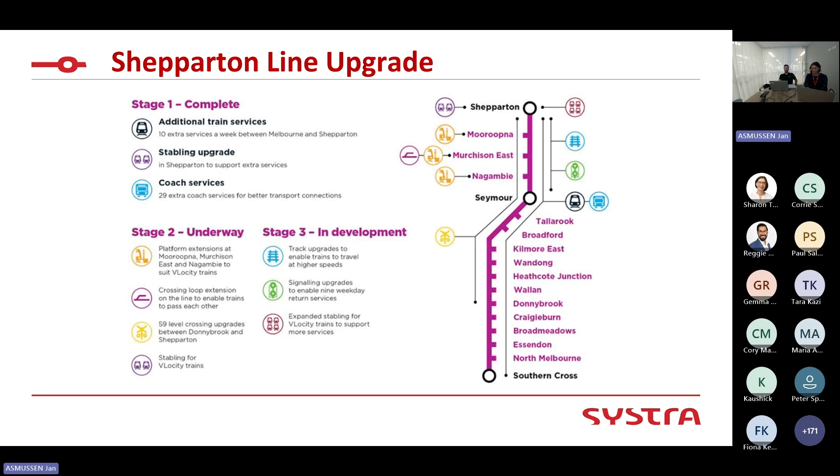So it's essentially a classic regional rail revival type project where you're increasing services between Southern Cross and Melbourne up to Shepparton and back down - almost a doubling of services in both the up and down, from about 5 to about 9 services, so essentially twice as much. Pretty big project.

So essentially what we did, when we came in, was in the first instance to understand what are the actual changes being introduced by the project and what the impacts are, because that's what helps us identify the best HF methods and tools that are amenable to reviewing and assessing these changes and the impacts, to provide that level of assurance that's required by the project - to basically provide the evidence of whether this design is acceptable or not for the end users and the intended use.

So the 5 high-level or main changes were: an extension of the TCS, the train control system called SIGVIEW, extending that across a wider area of the network, reducing train order working in those more remote areas. Train order working obviously has a pretty manual, onerous process, a lot of verbal paperwork, etc. This improves situational awareness with the new digital system.

Then we have the introduction of the Electrocode, which I'll explain in more detail later, because that's one of the examples we're looking into. That's to do with latency for setting and canceling routes and some new failure scenarios.

Then there's also the introduction of the slot - again, I'll go into more detail on the slot because that's our second example. Essentially there was additional tasks related to operation and interpretation of the slot mechanism. And then we had new signaling equipment, such as interlocking new track sections, so there's some failure scenarios associated to that.

And then, as I mentioned previously, an increase in train service, so more train routing and regulation and management of trains. We basically, together with the project engineers, identified what the changes were, the impacts, and then decided on what methods and tools we should use to apply to the work that we were doing. In the next few slides, I'll highlight what those methods were, and show how they were suitable to helping us provide that assurance for the system and the technology we were looking at.

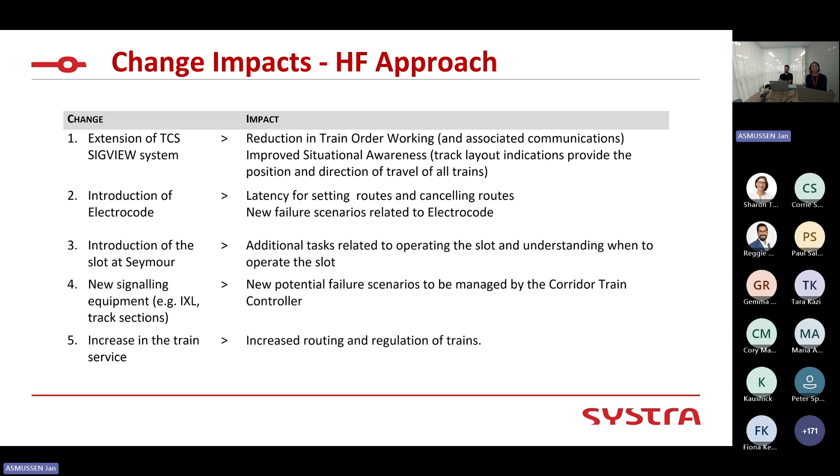So, example 1, as I mentioned, the slot. I'll briefly explain for those who don't know what a slot is. A slot is essentially a mechanism that manages the movement of trains onto a bidirectional single line between 2 different signaling areas. So you have signaler A and signaler B, they've got a straight piece of track, it's bidirectional, and only one train can go in at a time. So this slot helps manage the train moves into that section so that only one train can be going in at a time.

In one direction, essentially. So it kind of replaces the need for verbal communications and whatnot. It's essentially like a handshake between those two signalers sitting in different areas, managing their own areas of control.

So essentially what we did was we needed to provide HF analysis to basically show that this design is acceptable and it can be interpreted by the user, provides them with the right level of information, they can use it, etc. And as you can see, it's a pretty complex and not necessarily immediately intuitive design.

The different color lights each kind of light up depending on different circumstances and different scenarios and what's happening with the system, what's the user doing. It also provides them with information about what can and can't they do in terms of what route can be set, what route has been set, et cetera. So it goes on. And this is a static image.

So these are the types of images that we were actually provided on the project to help do our analysis on. So we didn't have a demonstrator or any dynamic environment to use to discuss with end users, elicit the system feedback, explain the behavior, et cetera. It was all with static images, and that was just the nature of the project and what we were working with. So that also kind of drove the types of methods and tools and approaches that we applied, which I'll get into in a bit more detail.

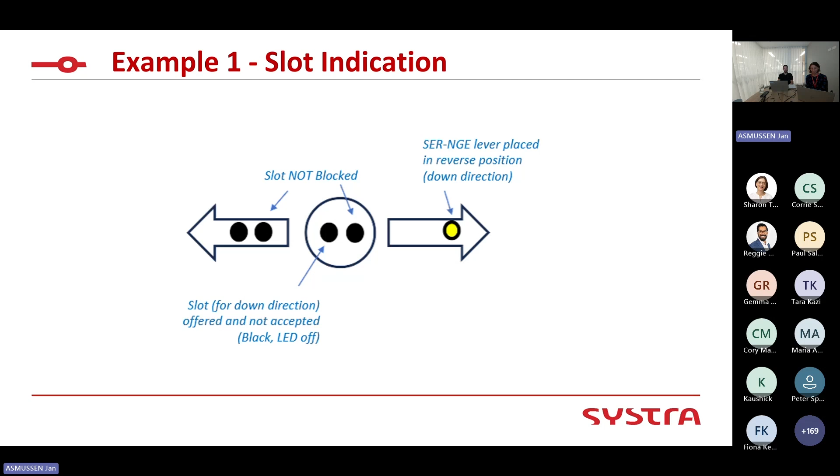So I'll move into the next bit. One of the first steps we did was defining the types of scenarios.

So looking at, what are the type here, we call them tasks, but these are essentially the different scenarios related to this indication. Working together with the project engineers, technical SMEs, we kind of identified all the possible scenarios and use cases relevant for that indication, where the user would need to interpret or use that indication to do their tasks or carry out these scenarios.

So we identified 4 in total that were relevant to the slot. There's setting the route, both in the up and the down. Then there's a local signaler - the one who sits and controls Seymour. And then we have the train controller who sits in Melbourne, called central - the central controller that controls a wide area of the network. Seymour is a local signaler, and they're just controlling their own local area over in Seymour. So the local signaler can turn a train back somewhere around here.

And that was a scenario that wasn't initially identified as relevant, but through the work that we did - through engagement with the end users - we identified that this would be a viable scenario that we would need to look at to understand how that all works.

And then we also had route setting when interlocking is disarranged, which was essentially a failure scenario. But for the purpose of today, I wanted to focus on just the task or scenario of setting the route, and we'll work through the next few slides.

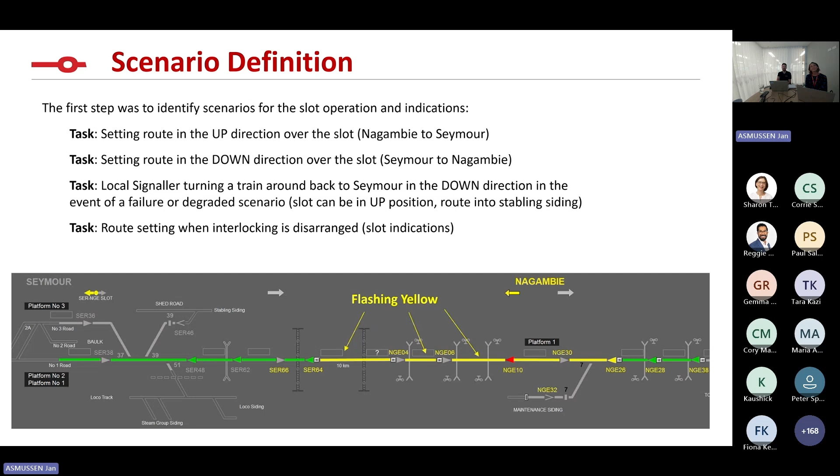What we did was we used a human error analysis, essentially a Sherpa, to structure that analysis and look at all these different types of information: what are the tasks, what are the critical, high safety, high operational impact tasks if there were any, and what are the consequences. Then we identified what types of controls are already in place through the design, or where the design might need to be changed to mitigate or manage these errors identified through application of our HEA. We've provided a simplified excerpt of the HEA just to show what the task was, the roles involved, a description of the types of errors identified, and the consequence.

That's how we worked through to identify all the different system behaviors and the controls or design elements that either helped or were required to help manage or mitigate these errors.

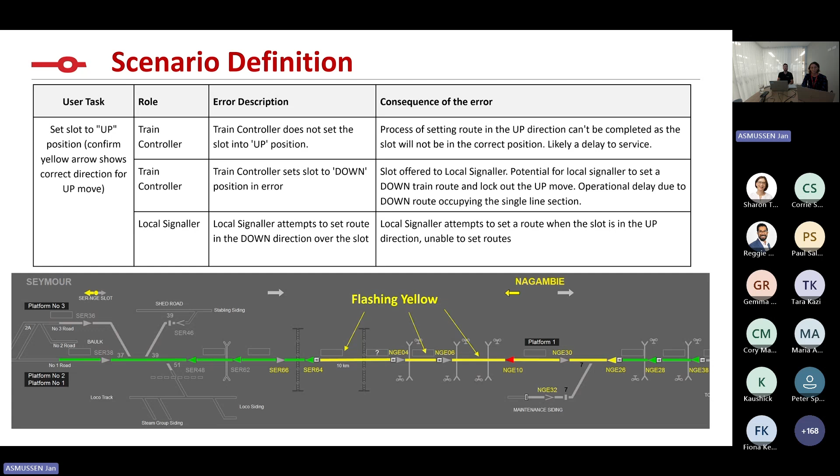Just a bit more technical detail here for those interested. This was the first task, setting a route in the down direction, down being from left to right. This is where the local signaler at Seymour needs to set a route into the down direction, over and through the slot, to send the train onwards into Nagambie and further downwards. In the first instance, the train controller sitting in Melbourne Central Command needs to set the slot to the reverse position. Reverse is equivalent to the down direction, going to the right.

On the local signaler's panel, they have this color light panel with two directional arrows and a central circle. Those lights illuminate depending on the slot status. If the slot is set to down, that down arrow will illuminate the circle, indicating to the local signaler that the train controller has set the slot to down. That means the train sitting on road 3, which the signaler knows needs to go from Seymour down to Nagambie at a certain time, now has that slot set in the down direction. The local signaler knows that.

When the local signaler sets their route, the color light then illuminates yellow, telling the local signaler that their route has been accepted. Meanwhile, the train controller can see this on their train control system - this TLD is what the train controller sees. They can see that the local signaler has set the route, now set and locked, shown by the yellow indication.

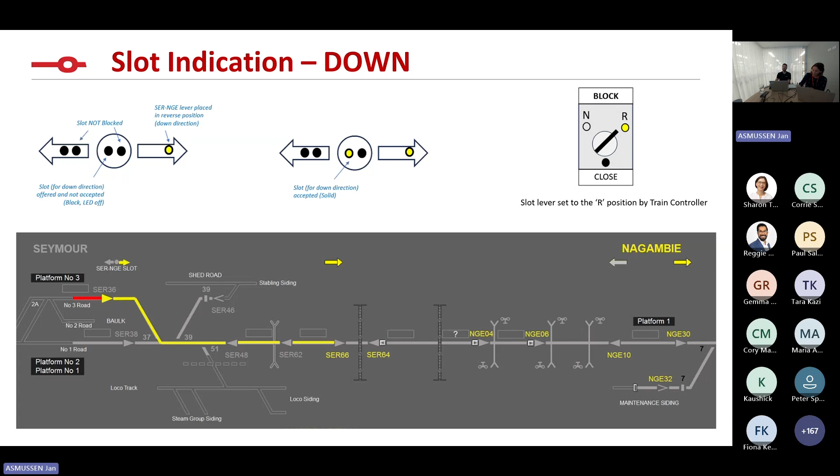It took a good amount of HF analysis together with the signaling engineers, the technical SMEs, and of course the end users. There was a lot of robust discussion with end users to really understand how this works, and to work through whether these indications provide the information needed to carry out the task of setting the route with no issues and no confusion potential.

Same in the up direction - I won't go into too much detail, it's essentially the same but reversed. The train controller sets to normal, which is the up direction, and sets the route. The color lights now tell the local signaler they shouldn't be setting any routes in the down direction because the slot has been normalized, and routes now need to be set in the up direction. Interestingly, the illuminated circle in the middle will be extinguished if any routes are currently set in the down direction.

So that provides the local signaler with the information that maybe I have a route set here, I need to cancel that route. Only when I cancel that route can the slot offer be normalized, in the sense that now the up route is set, this circle illuminates, and now that slot is completely blocked off. I can't set any routes in the down. I'm waiting for that up train to come through.

That also tells the local signaler they need to set their route from SER62 into whichever platform or road that train needs to go into, either road 3 or road 1 down here. So again, that's the interplay between information and really understanding how the user is interpreting that information, and what they actually do with it in terms of the tasks they need to carry out.

So that was essentially what we went through, looking at all the different scenarios and tasks related to the route setting and the information provided by the system. And then essentially the outcome was we did change one thing with the design.

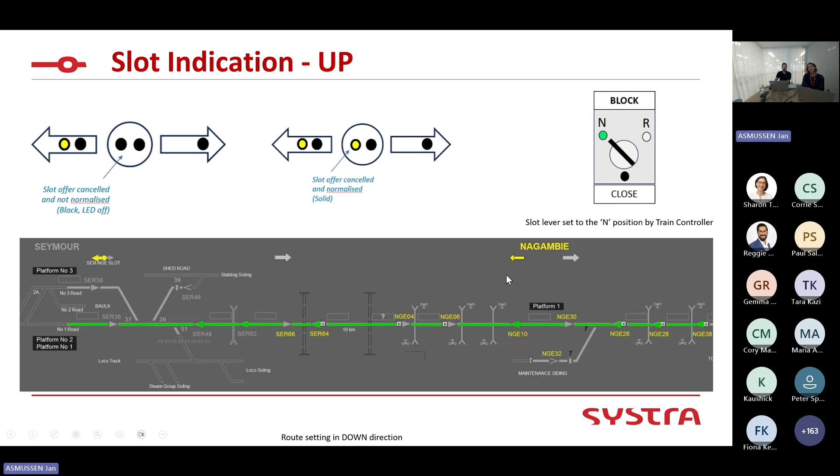And then for the local signaler's control panel and the slot indication, no change to that one, based on our human error analysis that we conducted, as well as the HMI analysis, which was a complement to the HEA, where we essentially looked at four classic heuristics from the 11064 standard, a classic HF standard.

So looking at information requirements, as I said earlier, what type of information does the user need in order to carry out their tasks? Mental models, does the information align with how the user is interpreting and understanding the information to use? Information coding, that's to do with, in this case, the color yellow being used for the lights, aligned with their understanding of the use of color yellow in other aspects of the system.

And then of course error tolerance, which is closely linked to the human error analysis that we conducted. So that essentially rounded out the analysis, allowing us to demonstrate that the slot indication, user interpretation, and operation of the slot was acceptable. That provided the assurance to say the design is okay with that one minor change I mentioned earlier, and all that provides robust assurance evidence.

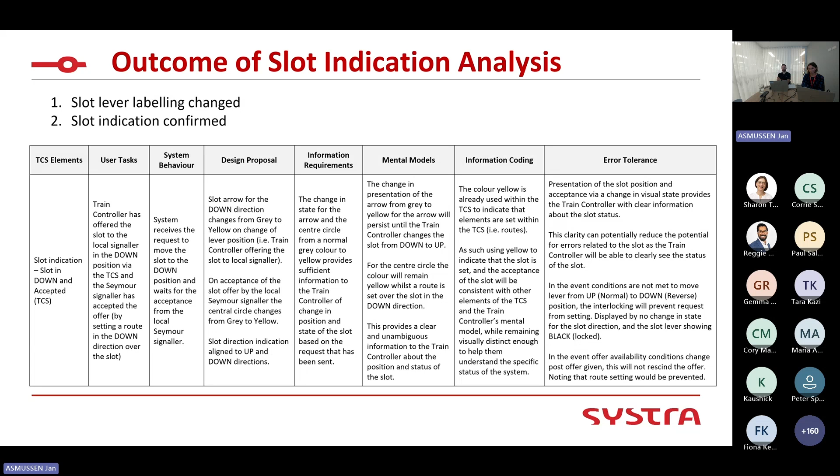Cool, then another example, example 2, as I mentioned earlier, we were looking at this electrocode system, which has an inherent latency associated to it. The electrocode is used where two interlockings are speaking to each other, and one interlocking sends the message to the other interlocking, and then that other interlocking has to send a code back.

So that takes upwards to 30 seconds for that to go back and forth, essentially, for the route setting scenario. So you can already imagine a train controller setting a route from, say, NGE10 to SER64. It'll take up to 30 seconds in the worst case scenario for that route to set, because those codes have to go back and forth. There's a whole very complex technical reason how those codes work, with a million different codes and whatnot. We won't get into that, but essentially those codes need to go back and forth.

So within those 30 seconds, what happens? What information does the train controller need in order to understand what's happened once they set the route, and what's going to happen? What are they expecting to happen when that route gets set? And what indications are provided to let them know the system is processing the command they just entered, which was setting the route? So again, it's looking at what system feedback is provided. Does the system support the user to understand what's happening? Is it keeping them in the loop? And do they know what's going to happen as an output of the actions they've entered into the system?

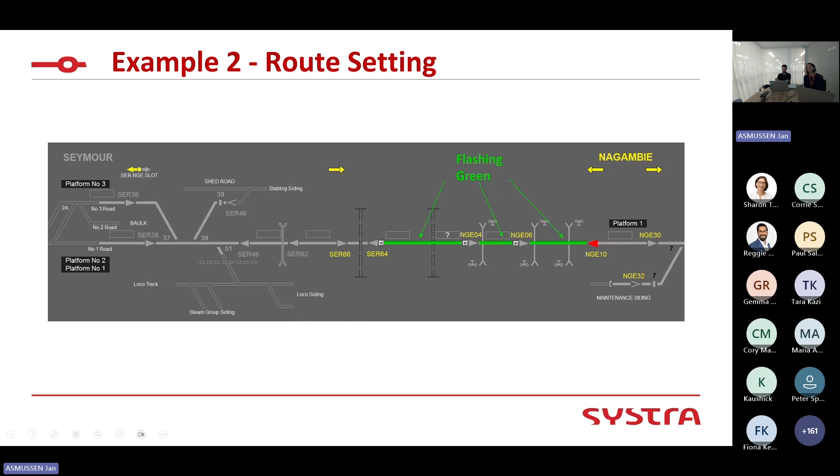So, firstly, just defining the scenarios: setting a route, canceling a route, and stacking the routes in the electrocode. We'll focus on setting a route for this one, and again asking ourselves the same types of questions: what's the information used for, what information does the user need, how does the user know that the route request is being processed, et cetera.

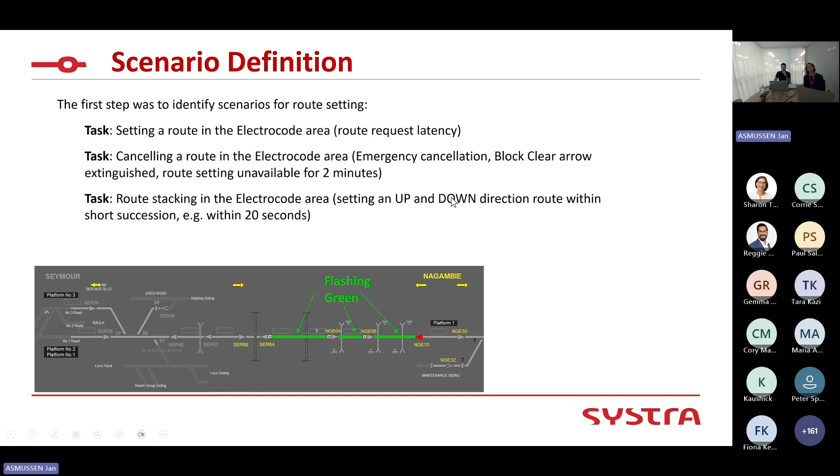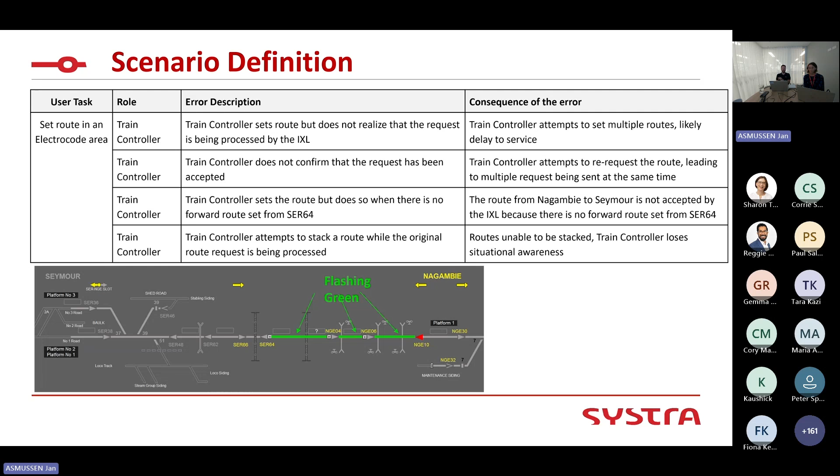So those are the types of questions we need to answer, and the same structure as previous: we're doing our human error analysis, identifying all the tasks, all the types of potential errors, and the user involved. In this case it's just the train controller, nothing to do with the local signaler. The types of errors we identified, consequences, and then looking at what in the design needs to change, or is the design acceptable to manage those errors. That's essentially what we work through.

Again, we extensively work with the signaling design engineers to understand the system behavior, working with static images. A lot of this is done in PowerPoint, where we're dragging and dropping the route indications, adding flashing yellow, pointing to where it's going to flash. So this is the level of fidelity we were working with, which was tricky at times, trying to convey this information and understanding, to elicit valid feedback from the end users and really understand how this actually works. That was interesting.

So essentially to talk through this one: originally, as you could see in the previous slide, it was flashing green. It went from, I'm pretty sure, no flashing indication, to flashing green, to then ultimately the design being a flashing yellow. The reason for the flashing yellow was identified through our HMI analysis and the HEA, looking at color coding, mental models, and heuristics.

Yellow was already a color used in the system, and it means the route is set and locked, shown bottom left here. If this were flashing green, the train controller might expect the route to go from flashing green to solid green, but it could actually go from flashing green to solid yellow, which could be confusing because the user might expect it to just be set and signals to start clearing. But actually, for signals to clear, as mentioned previously, there needs to be a forward route set as well. So in this case, there is no forward route set, so this flashing yellow would go straight to a solid yellow.

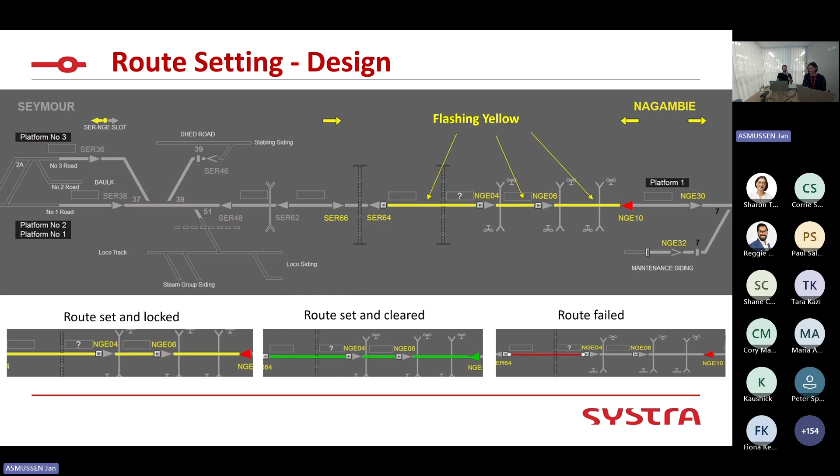And the outcome was, as I mentioned, the route setting indication changed, and as you can see here, this was our HMI analysis against the 11064 heuristic principles that we identified as relevant.

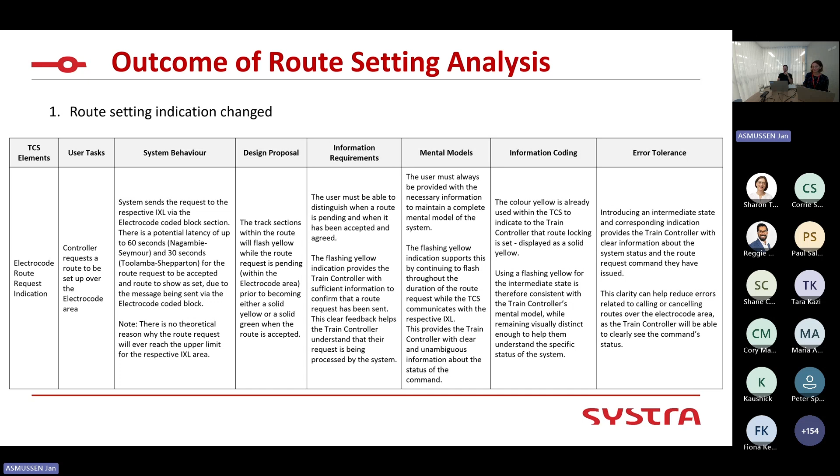Yep, I didn't realize how much time had passed. Yeah, almost on time. So, summary of lessons learned. This project was quite similar to other projects we've undertaken.

We've identified common themes coming out of the analysis we do when we apply human factors methods and tools to providing assurance for complex signaling systems or human machine interfaces related to signaling systems like a train control system, where we found that human error analysis is quite effective for really exploring the different

functions of the system. How does it behave? What are the classic errors? What tasks are there that are of high criticality - tasks with a high safety consequence or high operational impact if performed incorrectly? What types of errors, and what are the types of consequences coming from those errors? So from that perspective, the HEA is quite a powerful tool for doing that.

Especially when you have, as I mentioned earlier, low fidelity inputs like static images, or where you don't have a robust environment where you can really delve into and work through dynamic scenarios.

So I think one of the key learnings here is, where possible, scope it out from the beginning to have high fidelity environments where you can really put users in front of it, or conduct workshops around these types of environments to elicit feedback from the users and interpret the design.